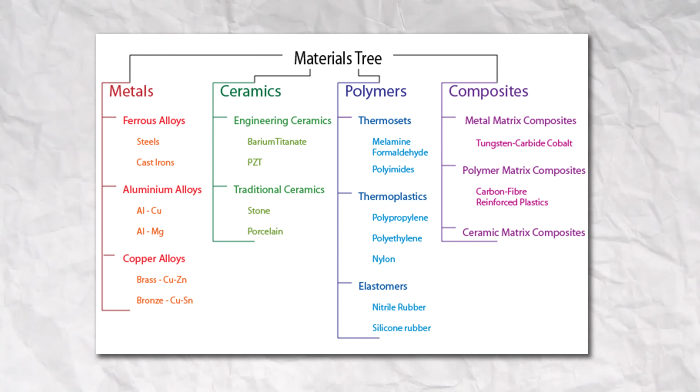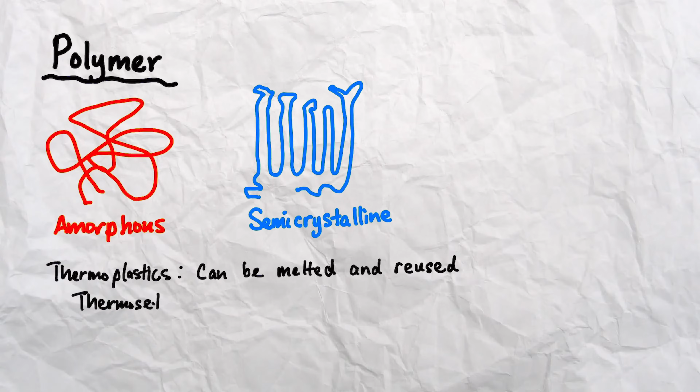For example, the structure of polymers is either amorphous or semi-crystalline. Thermoplastic polymers can be melted and reused, while thermoset polymers do not melt when heated. You should also be familiar with different types of engineering plastics, such as polycarbonate, ABS, polyethylene, PLA, and PEEK. Expect to be asked about some of these materials in a job interview, including their material properties and applications.

Metals, on the other hand, have a more well-defined crystalline structure, including body-centered cubic, face-centered cubic, and hexagonal close pack. When it comes to metals, you should be familiar with the various types of heat treatments and strengthening mechanisms used to enhance their mechanical and chemical properties, such as strength and hardness. Common heat treatment techniques include annealing, quenching, tempering, and precipitation and case hardening.

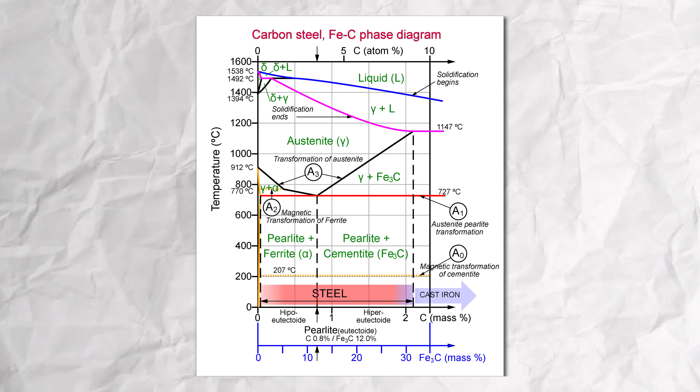Strengthening mechanisms at room temperature include cold working, work hardening, and grain boundary strengthening. A phase diagram is often used by material engineers to understand how metals and alloys behave at different temperatures and pressures. Composites, on the other hand, are made by combining two or more material types. There are metal matrix composites, polymer matrix composites, and ceramic matrix composites. The most popular composite is probably carbon fiber, which offers superior strength, durability, and lightweight properties.

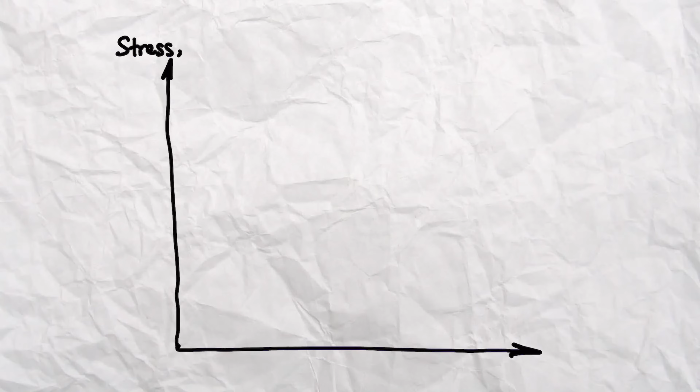Let's move on to the next class, mechanics of materials. One of the most important topics covered in this class is the stress-strain curve. This is a graph that shows the relationship between stress applied to a given material on the y-axis and the resulting strain it undergoes on the x-axis. Stress is a measure of how much force is being applied per unit area, while strain is the amount of deformation the material undergoes when subjected to stress.

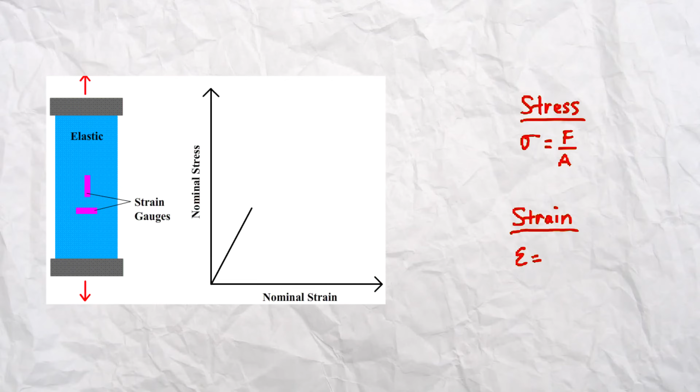This graph will look different for each material and is obtained by stretching or compressing a piece of material in the shape of a dog bone on a universal testing machine. Engineers use these curves to select materials for a new product to ensure that it can withstand the mechanical forces that it will encounter in its in-use application.

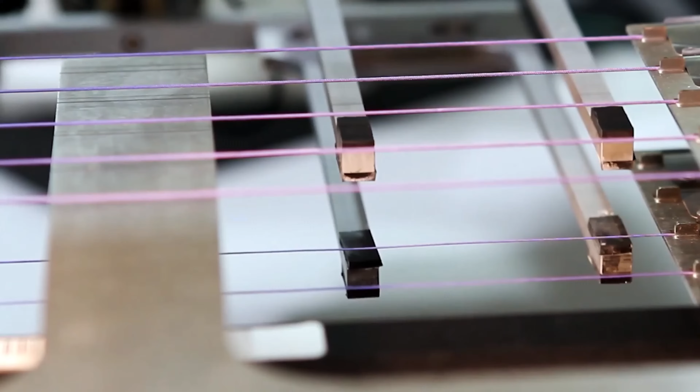For example, surgical sutures must have enough strength to hold living tissue together. Many engineering interviews will ask you to explain or draw this diagram, so it's good to be familiar with all the points and regions on it.

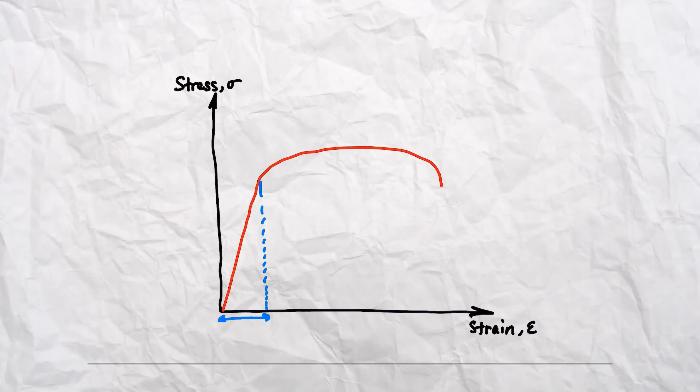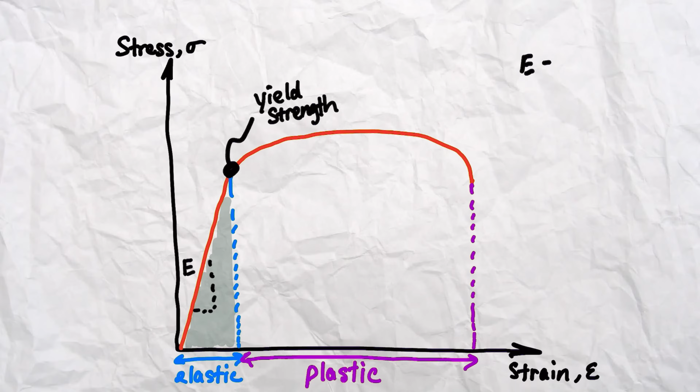The curve can be split into the elastic and plastic region at the yield point or yield strength. If I apply a stress that's below the material's yield strength, it will return to its original shape and stay within this linear region. The slope of this line is the Young's or elastic modulus represented by E, and is the ratio of stress to strain within the elastic region. The higher the value, the more stiff a material is.

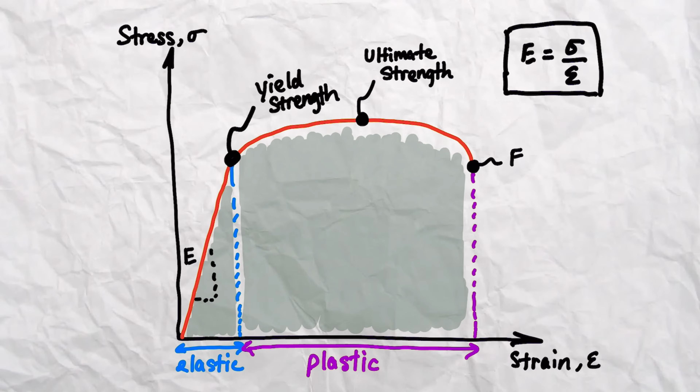Any stress exceeding the yield strength will cause the material to permanently deform, which is this nonlinear area known as the plastic region. The peak of this curve represents the ultimate strength of the material, which is the max stress a material can handle right before breaking. Finally, this point is called the fracture point, which is the stress at which the material breaks.

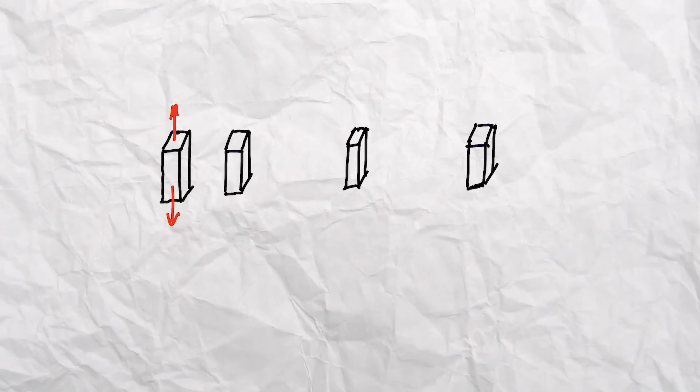Now, a material can experience various forces and moments. The ones you should know include axial loading, which includes tension and compression, torsion, and bending. When a beam is bent, you will use the flexure formula to calculate bending stress acting on it. Sigma equals negative My over I.

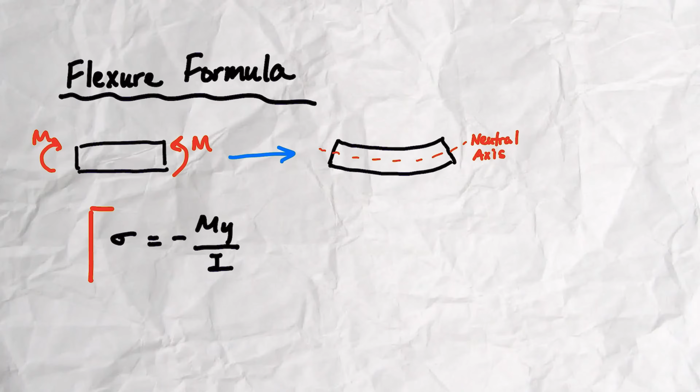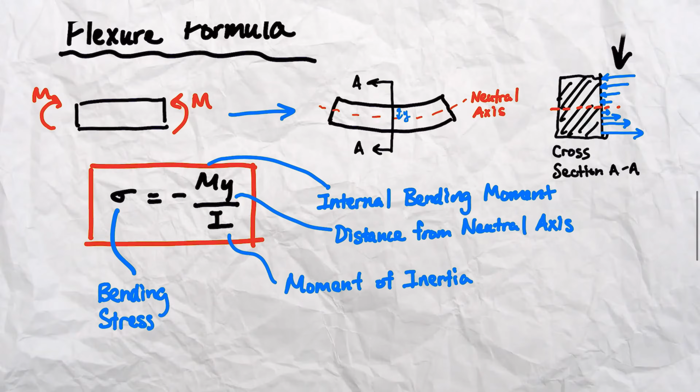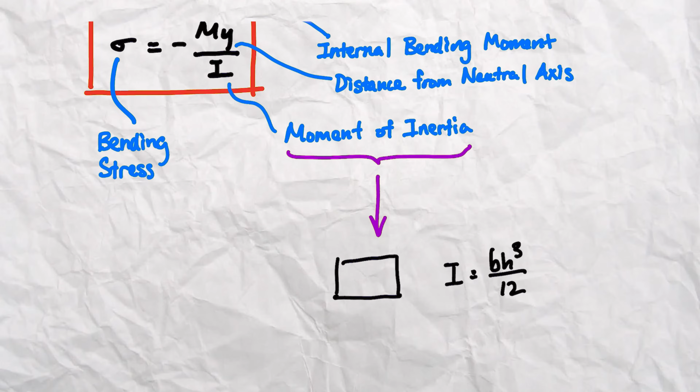Sigma is the bending stress represented by these blue arrows, M is the internal bending moment, y is the distance from the neutral axis, and I is the moment of inertia. The formula for moment of inertia will depend on your cross-section geometry and location of the neutral axis. In this case, it's a rectangle with the neutral axis passing through the centroid, so we have I equals bh cubed over 12. B is the width and h is the height.

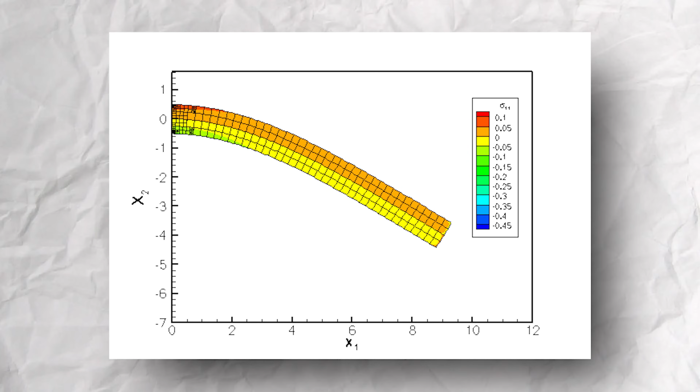Aside from the flexure formula, you should also know the deflection equation for a cantilever beam, which is a beam that has one fixed end and one free end like this. To calculate the deflection, when a force is applied at the free end, you can use this equation. Delta equals FL cubed over 3EI.

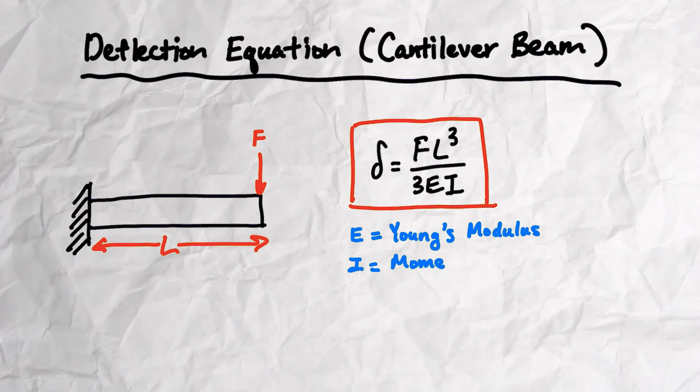F is the applied force, L is the beam length, E is the Young's or elastic modulus that we saw earlier in the stress-strain curve, and I is the moment of inertia that we saw in the flexure formula. This deflection equation is specific for this beam configuration and will be different if the location of the applied force changes, or say the beam is fixed on both ends.

For some reason, engineers have this weird fascination with beams, so expect to get asked about this equation in a job interview. With these two formulas, you should know how to calculate the maximum and minimum deflection and stress and where along the beam they occur.

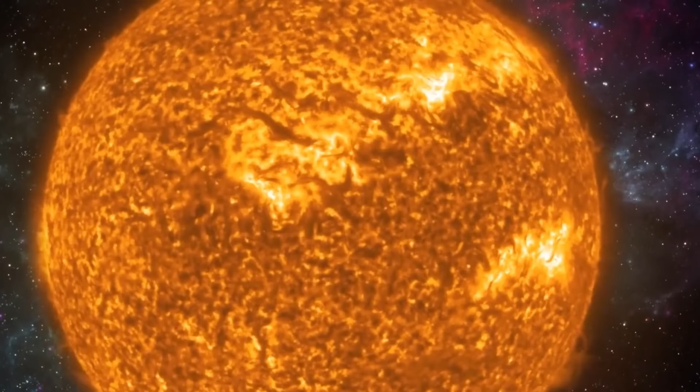Next is thermodynamics and heat transfer. These were separated into two courses at my school, and they're both equally important. While thermodynamics is a broad branch of physics dealing with the behavior of energy and matter in physical systems such as a rocket or refrigerator, heat transfer deals with the mechanisms and rates at which thermal energy is transferred from one object to another.

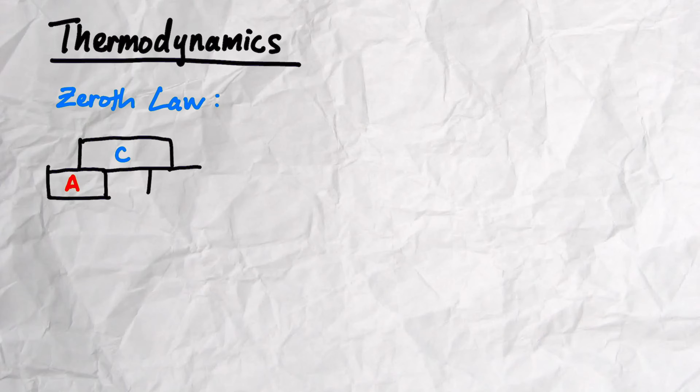There's a lot to know about thermodynamics, but for now, start off by understanding the 4 laws of thermodynamics. The 0th law states that if objects A and B are both at the same temperature as object C, then object A and object B are also at the same temperature with each other.

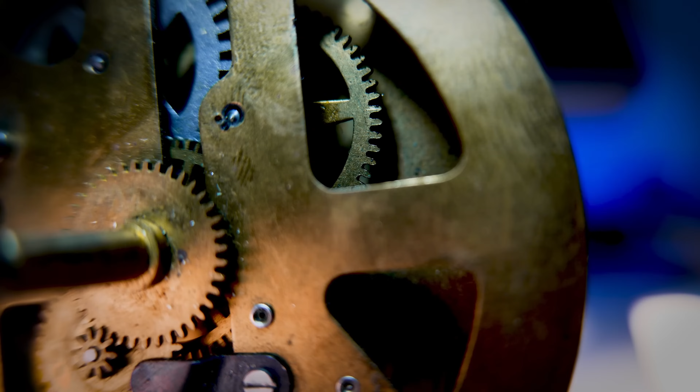The first law says that energy cannot be created or destroyed in an isolated system. It can only change forms. In other words, the total energy within a closed system remains constant. The first law can be represented by delta U equals Q minus W, where delta U is a change in internal energy, Q is the heat added to the system, and W is the work done by the system.

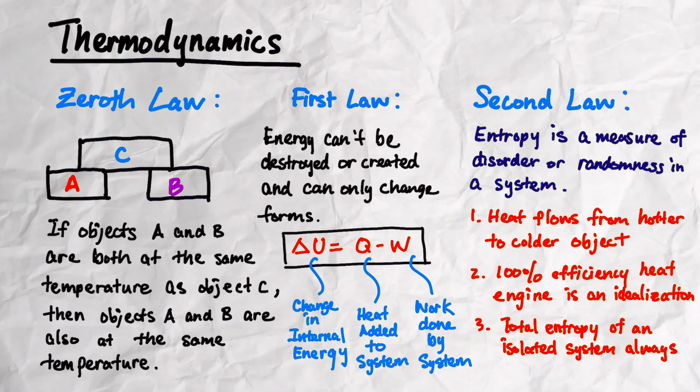The second law of thermodynamics introduces the concept of entropy, which is a measure of the disorder or randomness in a system, and says three things. The first is heat flows from a hotter to colder object. The second is it's impossible to create a heat engine with 100% efficiency. And the third is the total entropy of an isolated system always increases over time.

Finally, the third law states that it's impossible to reach absolute zero, or negative 273.15 degrees Celsius, using a finite number of steps or processes.

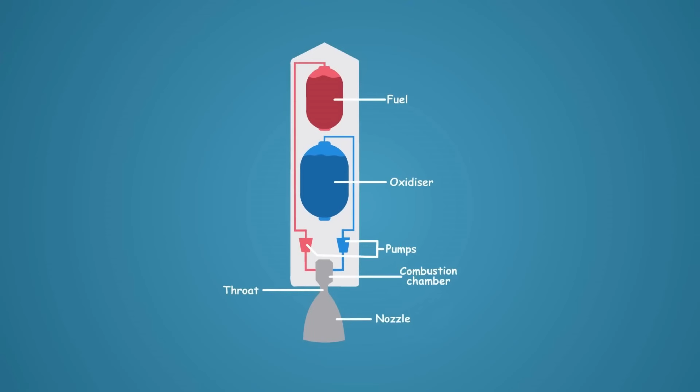Finally, you should understand the different thermodynamic processes and their applications, like isothermal, isobaric, isochoric, isentropic, and adiabatic. Take a rocket, for example. Fuel and oxidizer are mixed and burned, which results in higher temperature and pressure gases in the chamber. The process by which the gases expand as they pass through the rocket nozzle to generate thrust should be adiabatic.

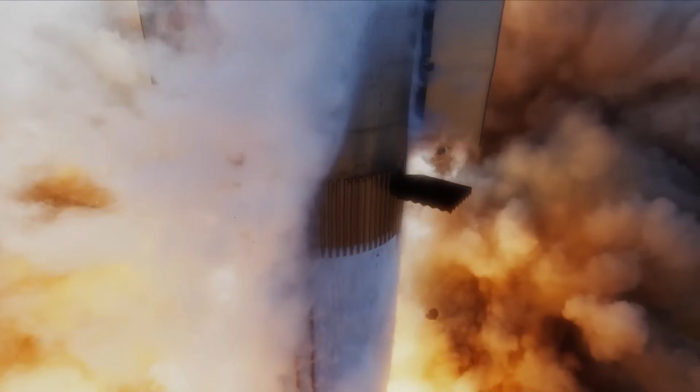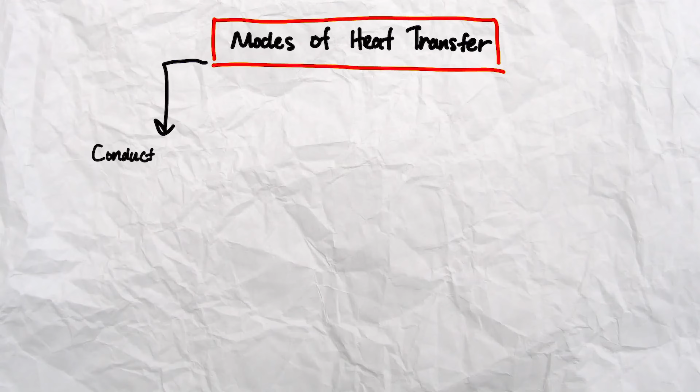For heat transfer, there are a lot of equations, but don't worry too much and start off by understanding the three modes of heat transfer: conduction, convection, and radiation. Conduction is when heat is transferred in an object or between two objects in contact due to a temperature difference, and is represented by Fourier's law.

Q dot represents the heat transfer rate, K is the thermal conductivity, which is a material's ability to conduct heat. For example, the thermal conductivity is excellent for copper and not so much for wood. A is the object's cross-sectional area, T1 is the temperature of the hotter end, and T2 is the temperature of the colder end, and L is the distance between them. Heating up a pan is an example of conduction.

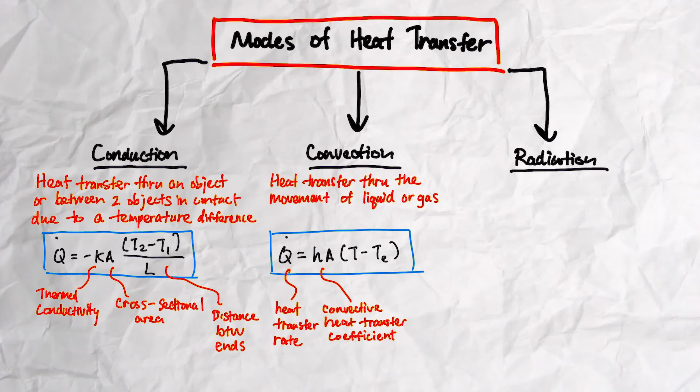Convection is when heat is transferred by the movement of a liquid or gas, and can be represented by Newton's law of cooling. Q dot is the heat transfer rate. H represents the convective heat transfer coefficient, which quantifies a fluid's ability to transfer heat. Water, for instance, is better than air at transferring heat. A is the surface area, T is the temperature of the object's surface, and TE is the temperature of the environment. An example is water boiling.

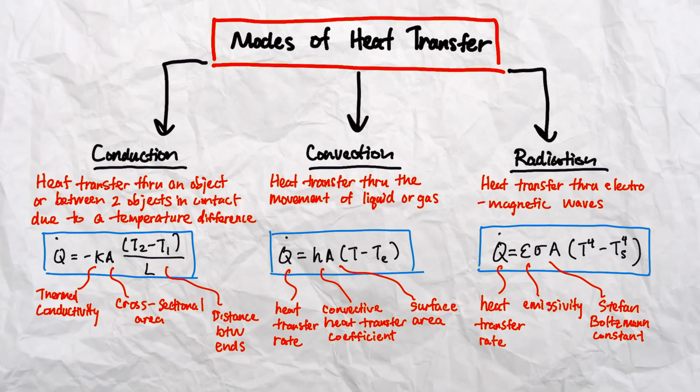Finally, radiation is when heat is transferred in the form of electromagnetic waves. All objects that you see emit thermal radiation even if it doesn't feel warm. It can be represented by the Stefan-Boltzmann law, where Q dot is the heat transfer rate, epsilon is emissivity, which quantifies how effectively an object emits thermal radiation, sigma is the Stefan-Boltzmann constant, T is the temperature of the radiating surface, and Ts is the surrounding temperature. An example is the sun heating up the earth, or warming yourself up with an electric heater.

Now let's talk a little bit about fluid mechanics. Now I can sit here and talk about the concepts and equations from this class all day, but if I did that, this video would be several hours long. So I'll briefly mention three important concepts that you should definitely know.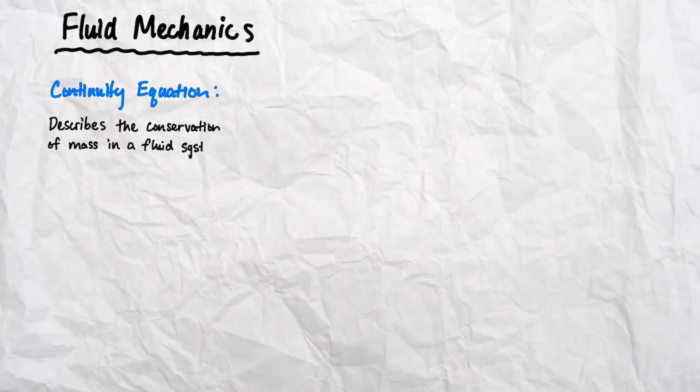First is the continuity equation that describes the conservation of mass within a fluid system. Assuming the flow is steady and incompressible, it can be represented by A1 times V1 equals A2 times V2. A1 and A2 are the cross-sectional areas at point 1 and 2 in, say, a pipe or tube. V1 and V2 are the velocities at points 1 and 2.

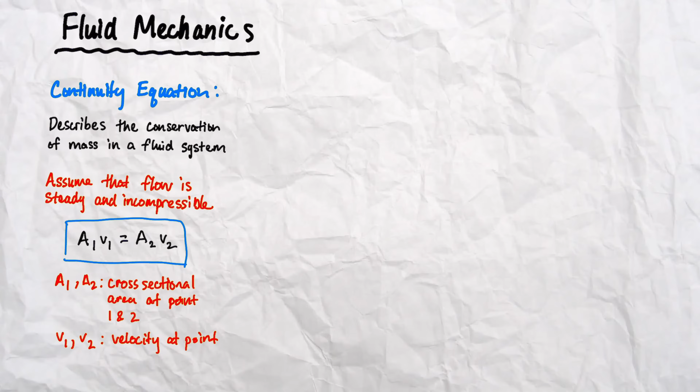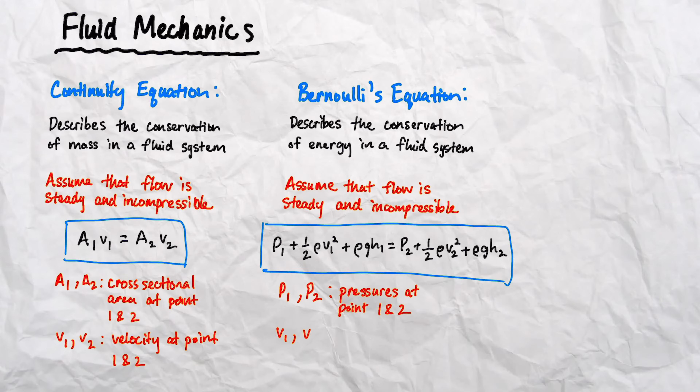Second, you should know about Bernoulli's equation that describes the conservation of energy for a fluid. Assuming that the flow is steady and incompressible, we can apply the equation to a single streamline in a fluid, where P1 and P2 are pressures at points 1 and 2, V1 and V2 are velocities at points 1 and 2, and H is the height at points 1 and 2. Rho is the fluid density, and G is the gravitational acceleration. This equation can be used to analyze flow across an aircraft wing.

Finally, we have the Navier-Stokes equation, which is a set of partial differential equations used to describe the velocity field in a fluid throughout space and time, and accounts for effects of pressure gradients, viscous forces, and gravitational forces. P is the pressure, V is the velocity, mu is the dynamic viscosity, rho is the fluid density, G is the gravitational acceleration, and inverted delta represents divergence, which just takes a vector field to produce a scalar quantity such as pressure or velocity.

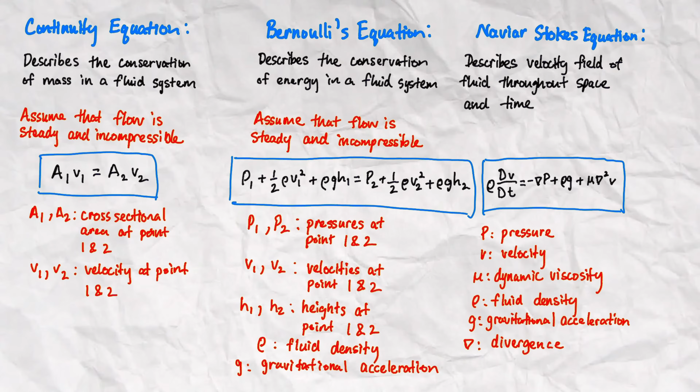Moving on to the more practical classes, we have manufacturing processes.

This class is very important because you learn about how different parts are created using a variety of manufacturing methods based on the part design, part material, annual volumes, costs, and lead times. The most popular ones that engineers use are CNC machining, injection molding, sheet metal forming, and 3D printing.

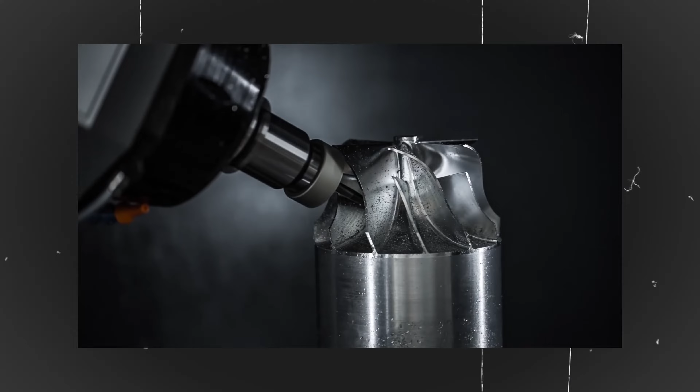CNC machining is a subtractive process that leverages milling machines and lathes programmed with G-code to generate tool paths and precisely remove material from a piece of plastic or metal raw material to create complex features and shapes.

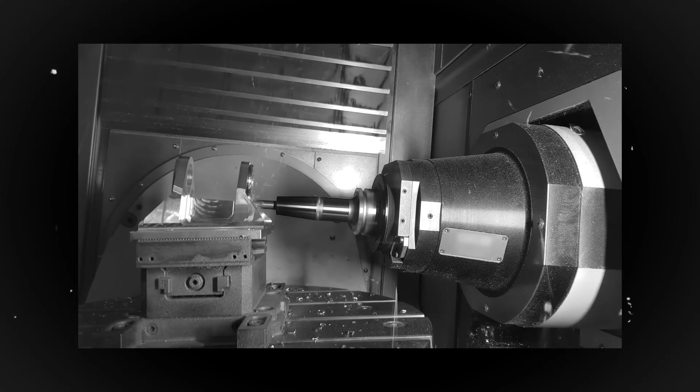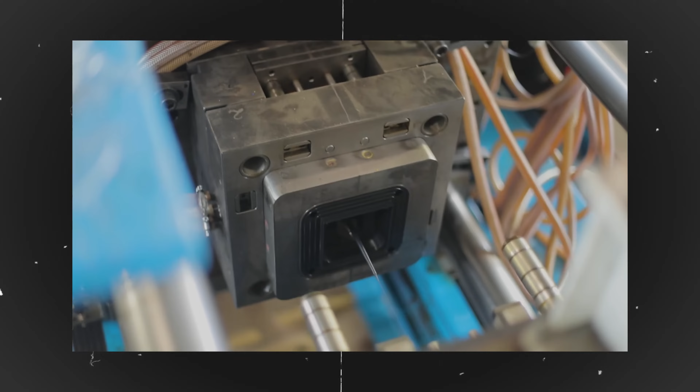Injection molding is great for high volume applications that takes plastic pellets and loads them into a hopper. As the plastic pellets are pushed forward by an auger, they melt and the molten plastic fills a mold cavity where it cools, solidifies, and is ejected from the mold core by ejector pins. The part is finished and the process repeats all over again. Without injection molding, we would never come to know the wonders of Legos.

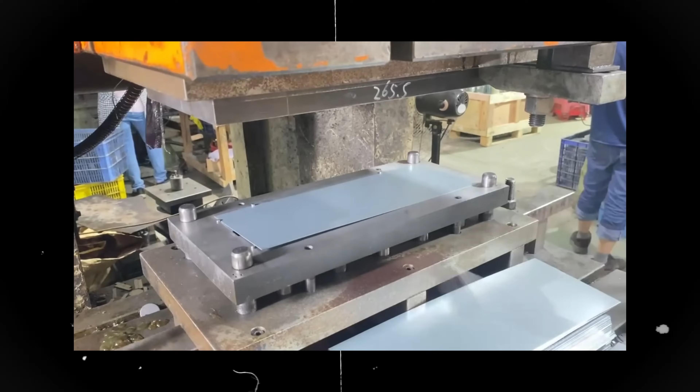Sheet metal forming is when you take a flat sheet of metal, deform it by applying a force using various methods such as bending, stretching, and stamping. Car door panels, for instance, are made with this process.

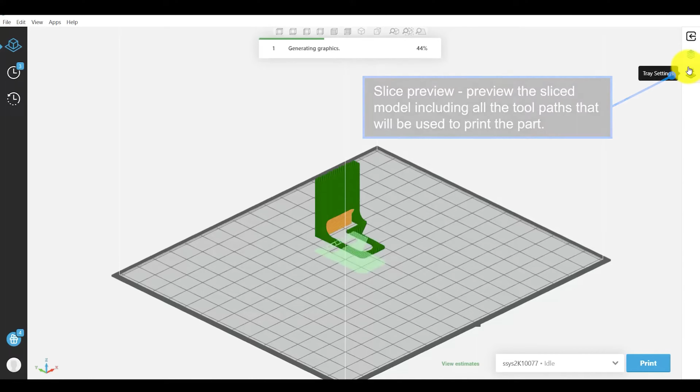Engineers rely on 3D printing to make prototypes and even low-volume end-use parts. To 3D print a part, engineers will take their 3D CAD model and save it as an STL file where the 3D model is sliced into very thin horizontal layers. The printer adds one layer on top of another following the instructions from the sliced file, and the material cools and solidifies after being extruded from the nozzle.

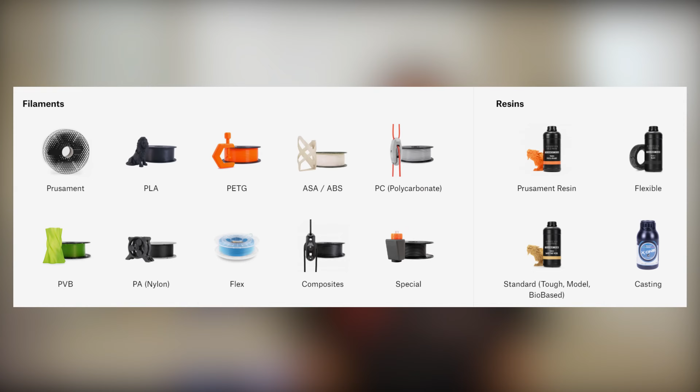Most 3D printers print in plastic, but there are also metal and ceramic ones. The material is usually in the form of a spool of filament or powder depending on which technology the printer uses. The most popular ones are FDM, SLA, and SLS. If your part has complicated features like overhangs or undercuts, the printer will add temporary support structures like these that can be removed after the print.

As an engineer, you should be well versed in design for manufacturing, or DFM principles. For example, if you're designing a CNC milled or plastic injection molded part, you will need to apply the rules of thumb and design guidelines for each particular manufacturing process. In a nutshell, a plastic injection molded part should consider things like uniform wall thickness, draft angles, undercuts, and material shrinkage rates, while a CNC milled part should avoid deep, narrow features, sharp corners, custom hole sizes, and threads.

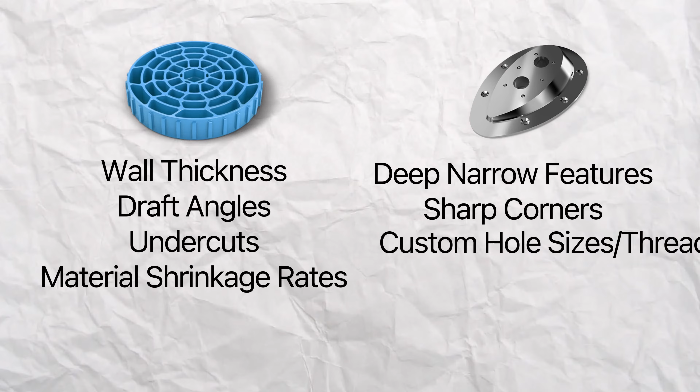If you look at any well-designed product, take this iPhone for example. Hundreds upon thousands of iterations and prototypes for each component were made and tested.

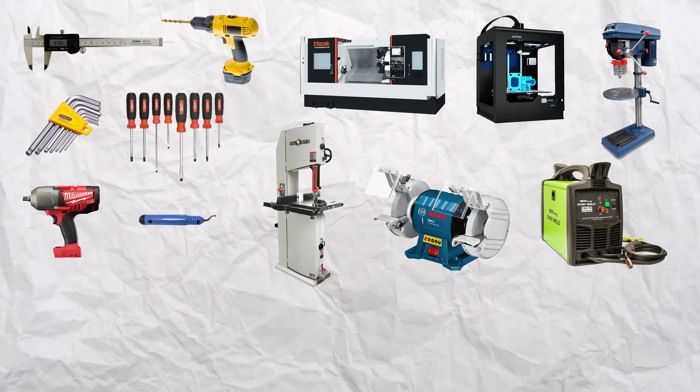To build these prototypes, you will need to know how to use some essential tools and machinery. Hand tools include calipers, hand drills, Allen keys, screwdrivers, impact drivers, and deburring tools. Equipment and machinery that are good to know include CNC machines, 3D printers, drill presses, bandsaws, bench grinders, welding machines, sheet metal machines, injection molding machines, soldering irons, multimeters, and oscilloscopes.

Saving the best for last, we have electromechanical design class. This class equips you with practical skills that make you employable.

First, you should become an expert at using at least one CAD software to design parts, such as SolidWorks, Creo, CATIA, NX, Inventor, or Solid Edge. Most of these offer student editions, so just pick one to learn and practice modeling anything you can find. There are plenty of tutorials on YouTube to help you get started.

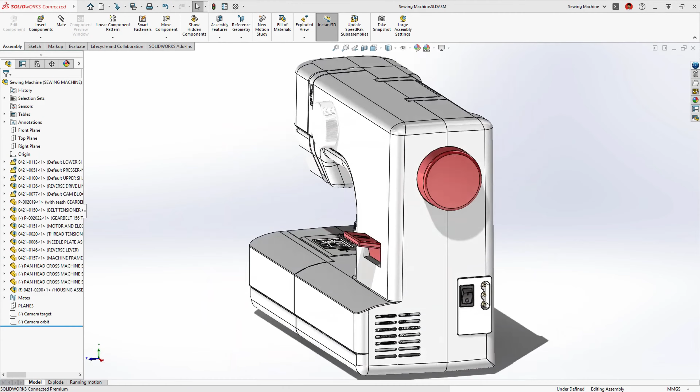Mechanical engineers use CAD to design 3D parts and assemblies of actual products, as well as to make 2D technical drawings so that these parts can be manufactured according to engineering specifications.

For every part you design in class or for a club, think what manufacturing process you would use to make it and how you can optimize part design to improve manufacturability and cycle time without sacrificing functionality and performance.

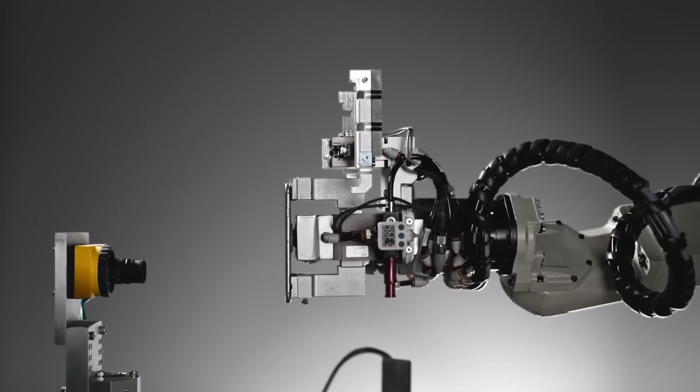Now, even though we're mechanical engineers, virtually every product in the real world, such as iPhones, robots, aircraft, and cars, involve moving parts and electronics. So another valuable skill that you should have is building simple circuits using breadboards and knowing how to program microcontrollers to control sensors, motors, valves, and lights.

Familiarize yourself with different types of brush and brushless motors, encoders, and sensors.

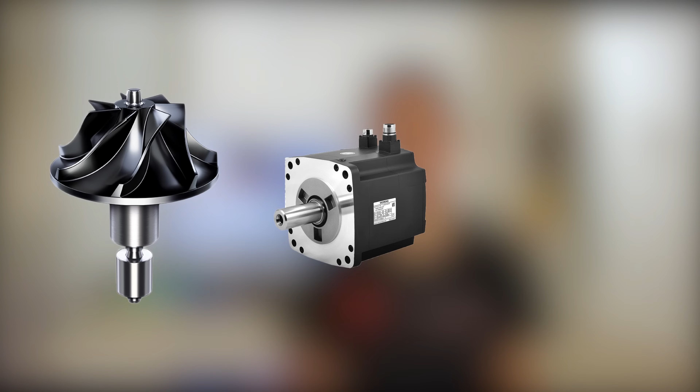Now, once you step foot in industry, you can't just go up to a machinist or your manufacturer and say, hey, here are the CAD models of all the parts I just designed. Make them for me. They will basically wipe you off the face of this planet if you do that.

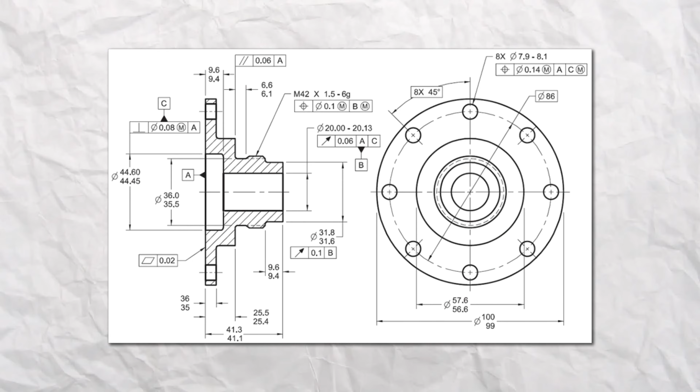As an engineer, you need to make professional 2D technical drawings that follow ASME Y14.5 GD&T standards. GD&T stands for Geometric Dimensioning and Tolerancing, and it's the universal language for communicating tolerances and geometries on a drawing.

There are 14 symbols in total that describe how flat a part surface must be or where a slot or hole feature must be exactly located. You should know what all of these symbols represent and when to use datums.

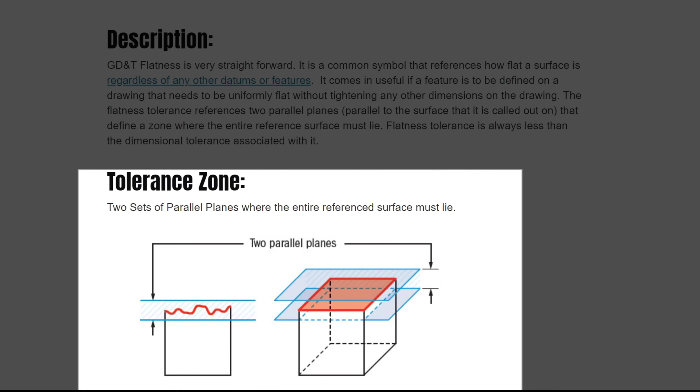For example, if I called out this flatness symbol for a part surface, the final surface must fall between these two blue planes parallel to it—one that's 0.03 inches above and another that's 0.03 inches below it. A quality engineer or technician will use a CMM or OMM to check if the part meets this specification.

Before engineers send parts off to be produced, they first need to perform a tolerance stack-up analysis to ensure all of the parts will fit together seamlessly based on the tolerances called out on the drawing. Tolerance is the allowable amount of variation of any given part dimension.

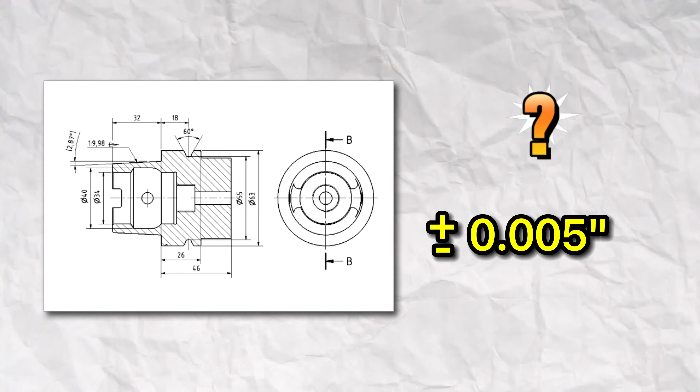Types of tolerances you can call out include limit, unilateral, and bilateral. For every dimension on a drawing, ask yourself if it's critical and if you can get away with calling out a standard tolerance of 5/1000ths of an inch, or if you need a super tight tolerance of 2/10,000ths of an inch based on the part's function. Inexperienced engineers tend to over tolerance, which can drive up part and tooling costs and drive down yields.

There are 3 kinds of tolerance stack-up analysis: worst case, root sum square, and Monte Carlo. Understand the pros and cons of each and try doing a calculation using Excel or 3DCS.

So these are some of the things I would focus on if I could start over and go back to university to relearn the material. By no means is it an exhaustive list, but as an engineer, you'll be in a very good spot if you work on understanding the theoretical concepts and developing the practical skills we just covered.

As much as I hate to say this, knowing these things cannot guarantee that you will pass engineering interviews and land your dream job. It'll definitely help, but it doesn't guarantee anything. That's just the hard truth.

Now, I want every single one of you to land your dream job. So if there's one thing I wish I knew before interviewing for all of these jobs, it's a systematic way to prepare for these interviews.

First, I will research everything about the company I'm interviewing for—their products, competitors, history, mission, and growth strategy. Second, I will know my resume and job description inside and out, because engineering managers love to kick off interviews by going through the projects and qualifications listed on your resume before getting into the meat of the technical questions.

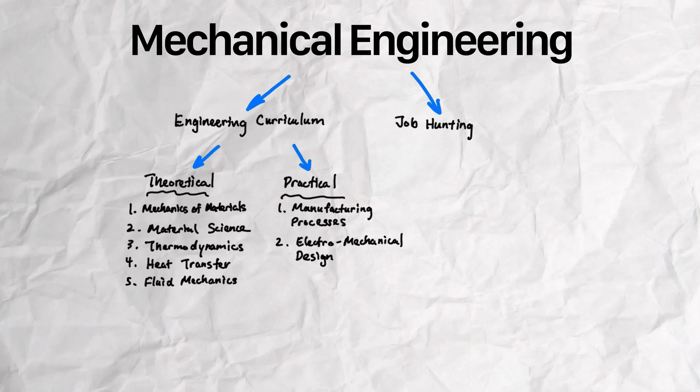To summarize, if I had the choice to study mechanical engineering again, there are 2 components I would focus on. Number 1 is understand the material from these theoretical and practical classes, which will help you become a well-rounded engineer and prepare you for the job hunting and interview process. Number 2 is research everything about the companies you are interviewing for and analyze your resume and job description to get a good idea of the questions you might get asked during an interview.